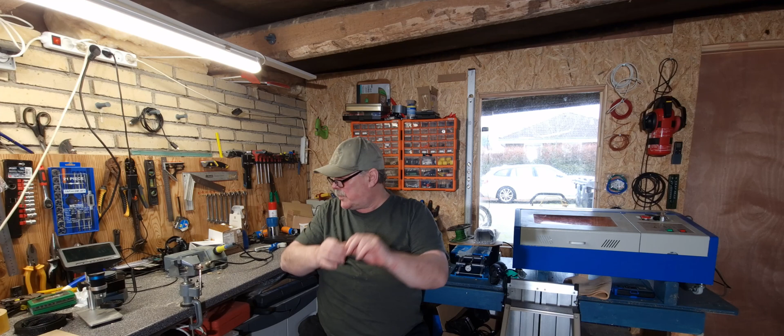But when I go up in size, here is a 6 millimeter as an example, you can see, I don't know if you can see it, but it's really a great result. Here I have, I think it's 8 or 10 millimeter, and it really fits great. Here 22 millimeter is also coming up really great.

One thing that I have done is I always print with the same material, the same temperature, and not too hot. This one is printed in good quality PLA at 195 degrees and with a speed of 45 millimeters per second, which, by the way, is not very fast, much slower than I normally do on my Sidewinder X1, but it gives a good thread and very nice nuts and bolts.

I also tried to print the biggest one I have in the app, and this is the 64 millimeter, and it also came out great. It's a little bit more slack in it, but if you turn it up here, I mean, it's really tight. It's very tight.

So let's take a look at the app and design a bolt, and then print it, and let's take a look afterwards if it fits together.

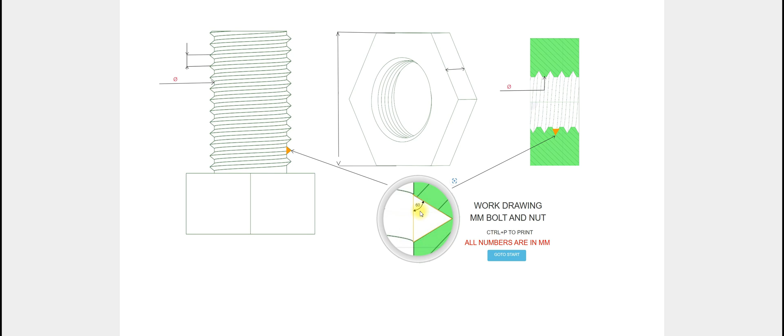So what you can do is you can choose between these different types of threads. I will probably add more at a time. Maybe I'll do other changes, I don't know, but if you have the link, you will absolutely see it when you try to go in from time to time.

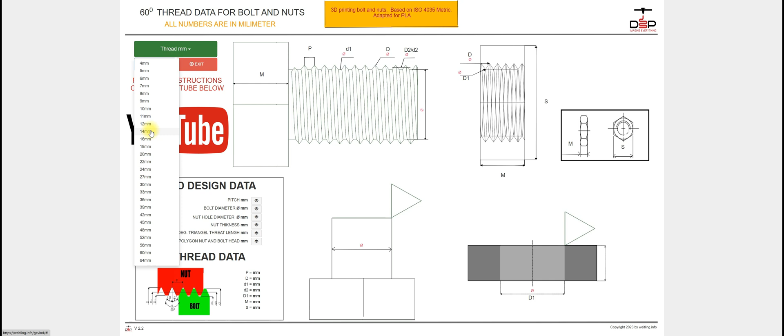So let's try to construct a 16 millimeter bolt, and you see immediately you get some calculations come up, and I follow them strictly.

There's one thing more here. If you want to see where the pitch is, 2 millimeter, you just point here, and you see this red dot come up there. The same you can do otherwise, just to focus in.

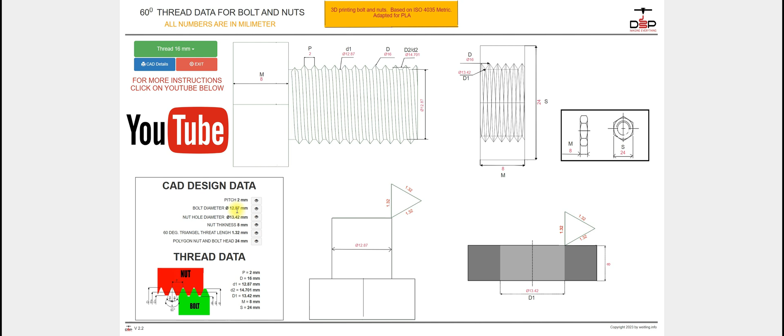Here you get most of the data. This is the thread data shown in a picture that is taken from the ISO 4035. These values are not equal to the ISO standard, though. I modified these by testing out the best way to get a bolt and a nut to fit together when you 3D print them.

So let's try to construct these threads on the bolt and the nut. Let's start with that. I use Design Spark Mechanical. I've done this for some years and I'm happy with that. Your preferred CAD program probably follows the same procedure.

So I have chosen view upside down on the Z-axis, and I will start with the polygon, which has 6 sides. Let me see, it was 24 millimeters and 8 millimeters thick, so we do 24. And we will need the bolt and the other diameter, and you see here this is 12.87.

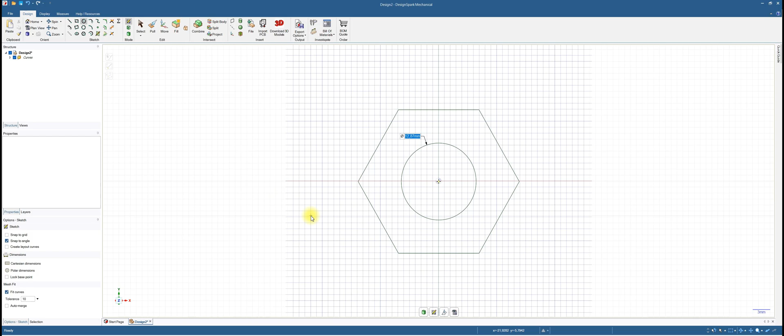So let's put that in, 12.87. So this is a bolt, and we now need to extrude it to the thickness, which was here 8 millimeters. This is exactly the same here.

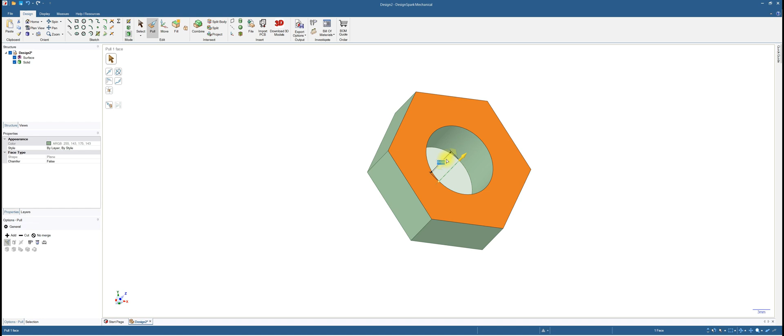So let's do that, let's add this tool here, and I click this face now so I can extrude this 8 millimeters. And this face here, do it with this one. This face is the next face we want to extrude. So let's do that, we use the pull again, and the first 8 millimeters brings us equal with that face.

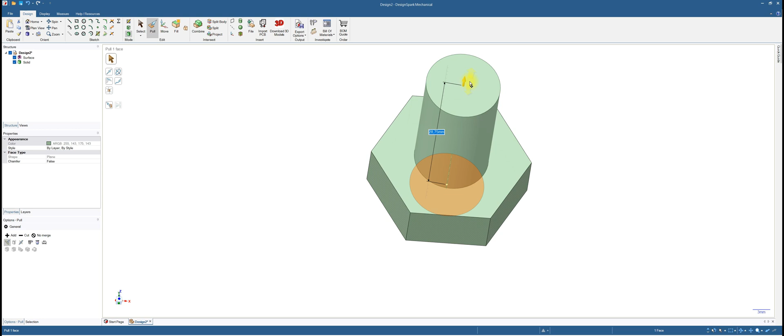And then let's go to 32 millimeters. Okay, so now we have the first type of dimension of the bolt.

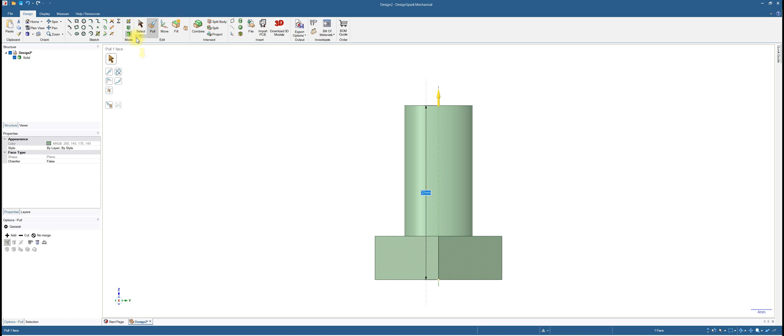But now I want to cut the bolt in two, so I can start creating the threads, and this is quite easily done. I click the center line here, and then I just use the section mode tool, and I got a cut in here. And the next step is now to create the triangle here, because we use the add method.

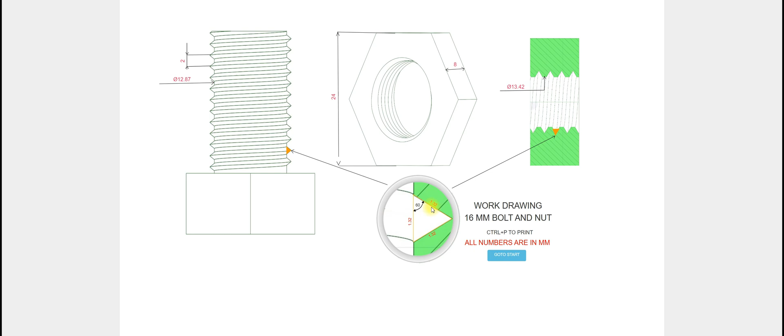This means we will add the thread across the bolt, around the bolt. So let me see what was this part here we are making now, you see, and this we will construct up here, and this is 1.32 millimeters, and each angle here is 60 degrees.

So let's do that, that's quite simple. I take a line tool and I add - here we need to be 90 degrees, what the heck, I already forgot, 1.32 of course, 1.32, 90 degrees, and here we need to be at 60 degrees.

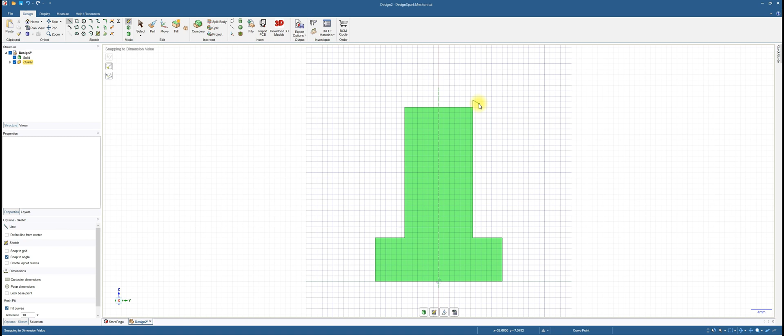1.32, and 1.32 on 60 degrees. So this is the thread we need to revolve on this bolt.

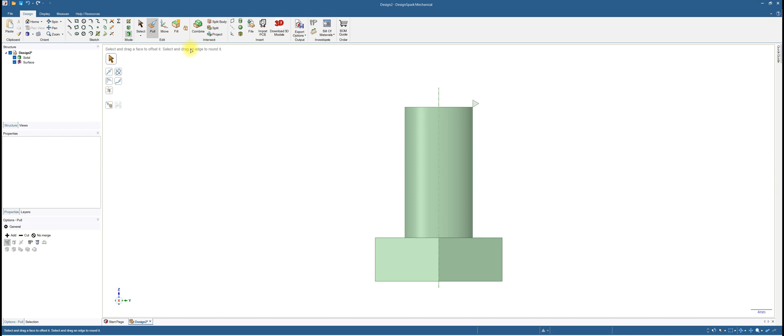And this is done by, I can use a pull tool and I mark this face - here you see the revolve. I click that, the axle I want to spin around, it turns blue, and over here you can see I have the add command, and when I push that I get these options to revolve a helix.

This gives me a possibility to enter the height. I will just drag it. If you know exactly how long you want it, you can enter it here. A minus value will make the thread go down, a plus value will go up.

But here I will not do that, I only want to give the system one piece of information here, and this is the pitch. The pitch in this case was 2 millimeters, which you see here. So I will enter 2 millimeters there.

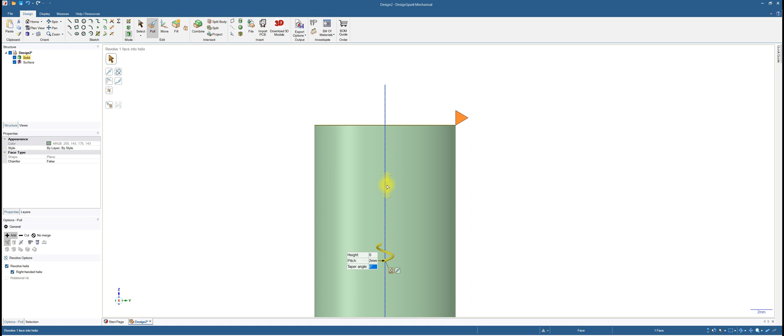So now we are ready to make the thread, and I will keep my left mouse button down, and now I make the threads by dragging down. And here we are. And that's quite easy, yes?

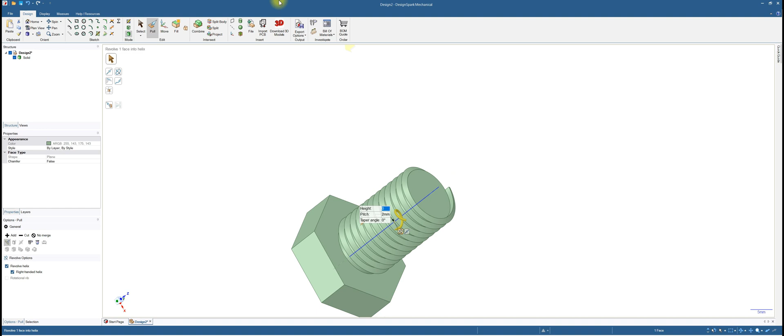Well, there's only one thing here, and that's we have this tab here. We want to remove that, and that's easily done. I mark this face, and I use the split body function, and it turns light green, and now you can see this turning into pink. I click and it's removed, and our bolt is done.

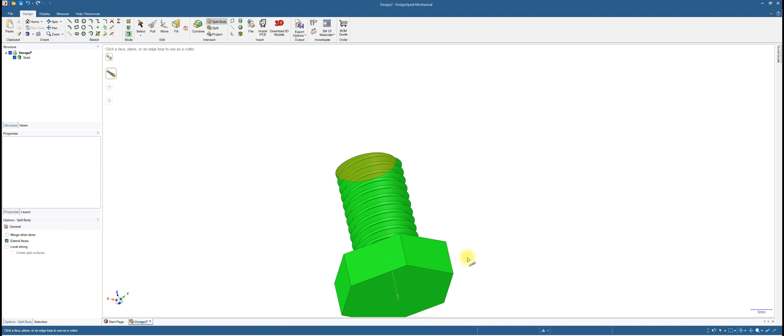Of course you can make the better finish afterwards if you want that, but that's up to you. So this is the bolt we have made, and we now need to do the export, an STL format, and what I will call it, test bolt 1.

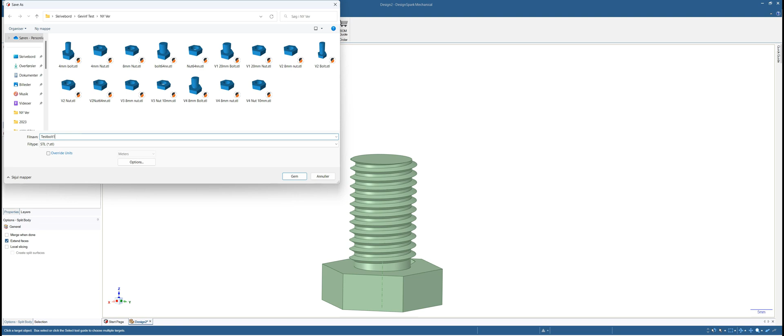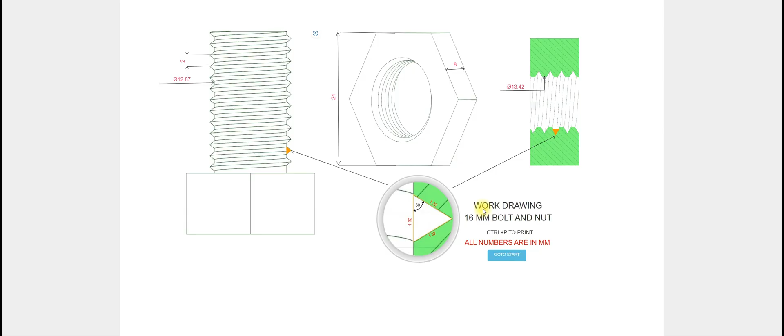And we are then ready to make the nut, and we start with exactly the same values. And if you remember here, we had 24 that direction, so we will call it 24 right now, which seems to be - I don't like it, I like it to be there, 24. And again we use a circle.

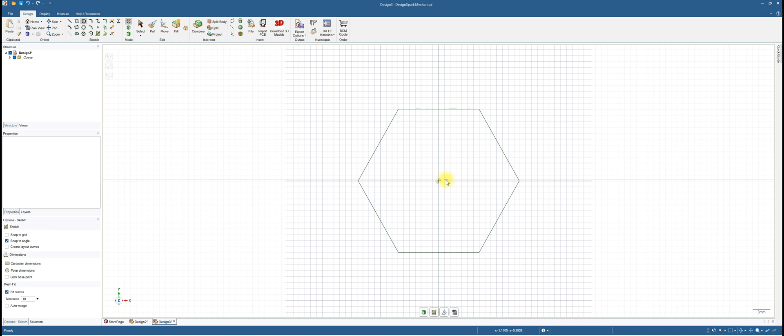It's exactly the same principle as when we made the bolt. And here we have a different diameter. We have 13.42 millimeters in diameter, which is to this face here. So let's do that - 13.42.

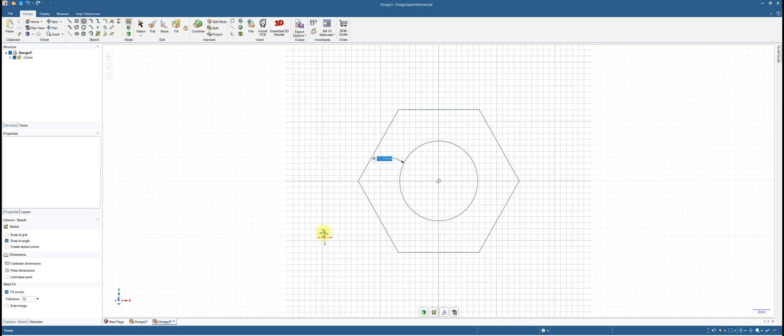There we go. So again we will use the pull tool, and we will extrude this face again, the exact same dimension, 8 millimeters high. There we go, and we put in an 8.

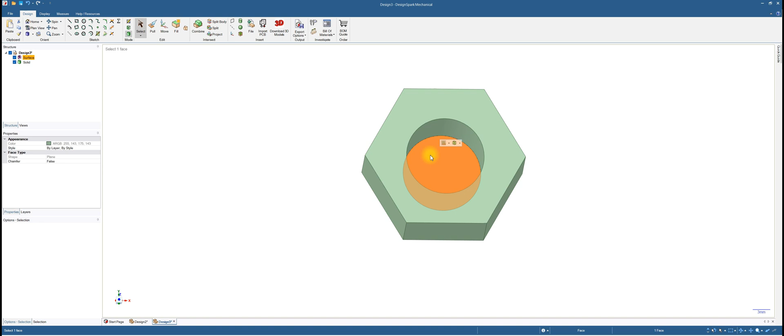The difference is that this face here we don't need anymore, so I just delete it, which we have done now. And again I take the x-axis, I mark the center line, and I do the cut, and we want to build the triangle on this place here.

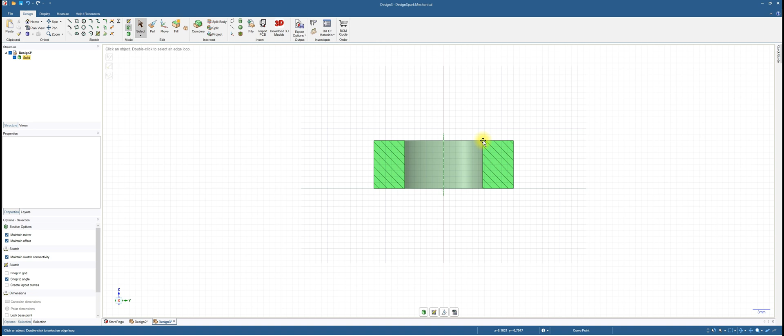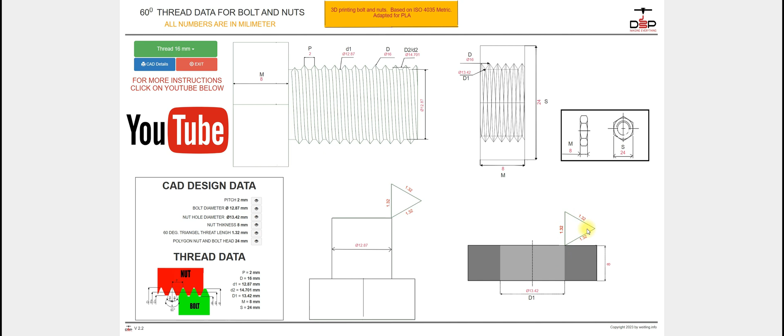As you can see here, if I go back, you can see we want to build it in this direction, and it has to be 1.32 millimeters. So let's make it 1.32, which is exactly the same as the other 1.32, and we go 60 degrees, 1.32.

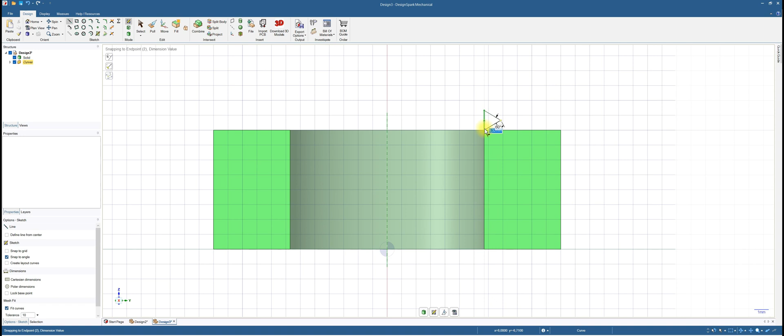And we should go in here. It should be 1.32 when we close this gap. So I will take the pull tool, so I'm ready to make the thread with the cut command.

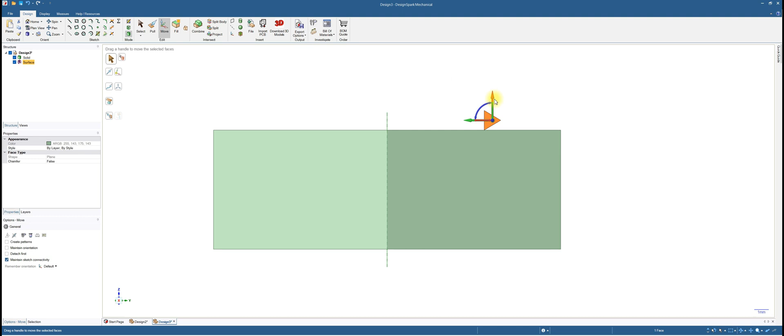So I use the pull, but before I do that, I want to mark this face and move it a little bit up, so that I just start in the air and make the thread through the bolt. And that we have done now.

Still with this face selected, I take the revolve command and the center line again, and now I use the cut command and revolve the helix. We already have the same pitch, and it's 2 millimeters.

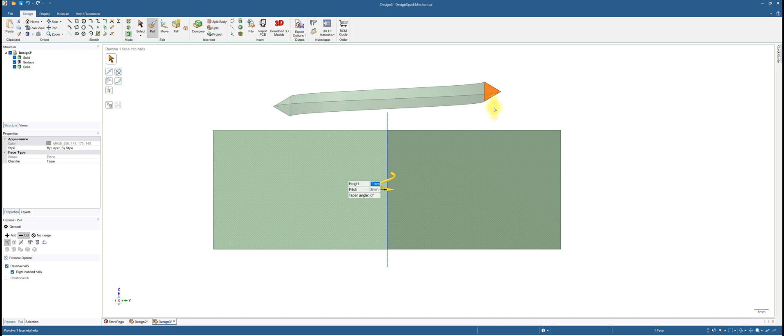So let's drag the helix, and you see here now it disappears. It's still making something, but it's just invisible because we cut in the air. But here I'm through, and if we look into the bolt, we have this beautiful thread here.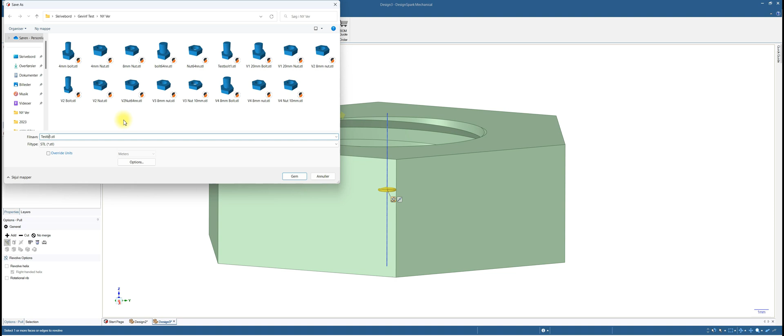And here we go. So now I want to add this to the printer, of course, and this means I need my slicer, which is here. So...

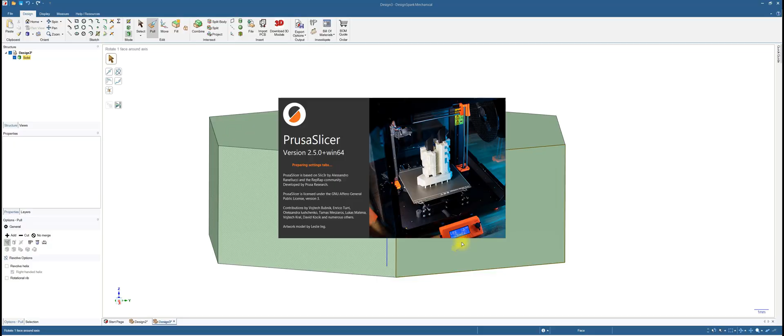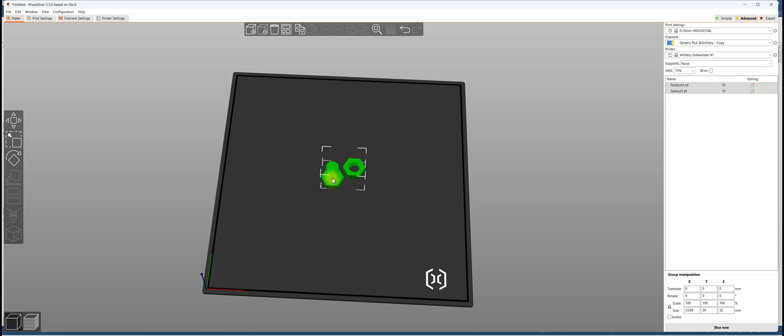And for this project, I take my test bolt, my test nut, and there we go, and I will sort them out. I have this one here. I need my camera there, so I will push it a little bit to the back.

I think I will try it at 0.2, honestly. I didn't try that before. And the first layer height will be 0.2.

The speed, I keep it down to 45 millimeters per second. The travel speed I also want to keep down, I don't want to shake so much. I do like that.

Absolutely no supports. There's no need for supports, and you don't want to have supports.

This is then the filament settings, and for the filament I start with the first layer at 205 degrees, and then I turn it down to 195. The bed I keep at 60 degrees.

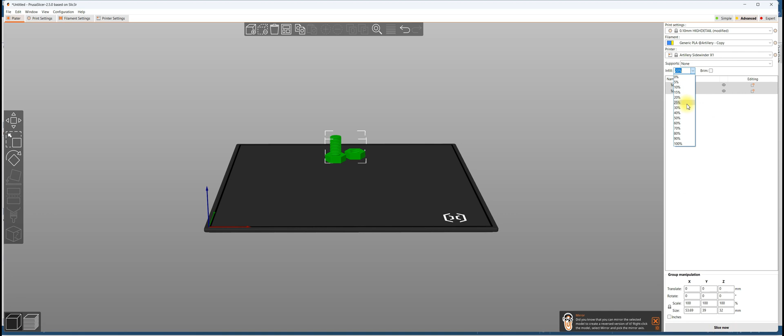I have an infill here of, let me say, 20% on this demo at least, maybe 25. And we slice it and see how much time it will take. So it will take 1 hour 6 minutes. Makes sense for this bolt.

And yeah, let me export it and put it into the printer.

So I need some tools here because something happened, and that will happen again. It's not a big deal. My printer was not absolutely correctly leveled, and this gave this little elephant foot.

And if I do here my bolt, you see it fits perfectly. But I come to the face which has been placed on the bed, and it gets a little bit difficult to get through.

So there is a part of an elephant foot in here, so I want to remove that with this tool here. Just cut off the thread inside, or the elephant foot, and now you can see very well.